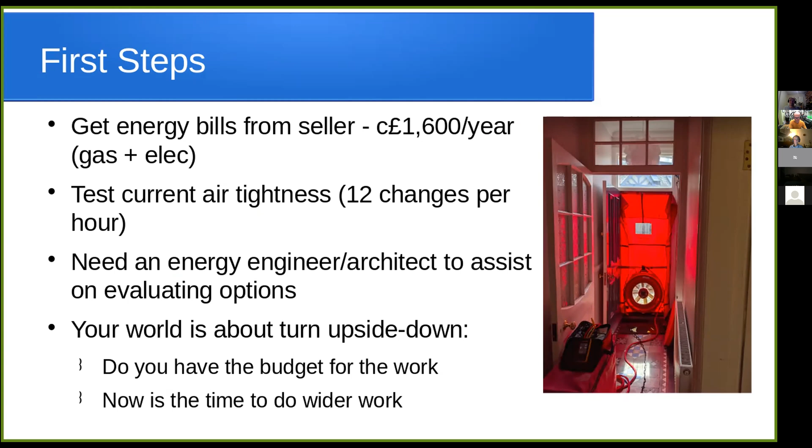So part of what I would do differently is I would think again about whether I could get someone to project manage on my behalf and pay for that. Taking that on board, I hadn't anticipated just how stressful that was. So getting someone as a project manager might be worth paying for.

In terms of that first step, what we did with Phil was we worked through a series of options using Passive House software to make our decisions around internal wall insulation versus external wall. If external, what are the issues with planning? So we made an early planning permission application - I can't remember what you call it, Phil, but there was like an initial request - so we could get that answered quickly.

We made that application, and it was very clear quickly that it was a no-go with external wall. So fine, we're going to do internal wall. Or which walls should we do? All of them? So we looked at what if we just do...

We're an end of terrace property. Maybe we should just do the end wall and forget all the bitty bits around windows. What does that do? Should we do floor insulation between joists? Should we be focusing on air tightness? Should we be focusing on glazing, etc.?

You get the outputs from the Passive House modeling, and it gave us a sense of what we needed to do. Then we could start budgeting and thinking how that marries up to what we want. It also allowed us to think a bit around what heating system we wanted.

The software is really good and very intuitive, and someone like Phil or others, if you're not too comfortable with some of the values it's talking about, it still gives graphical outputs like this and can be quite easily summarized, so you can have a meeting to discuss options.

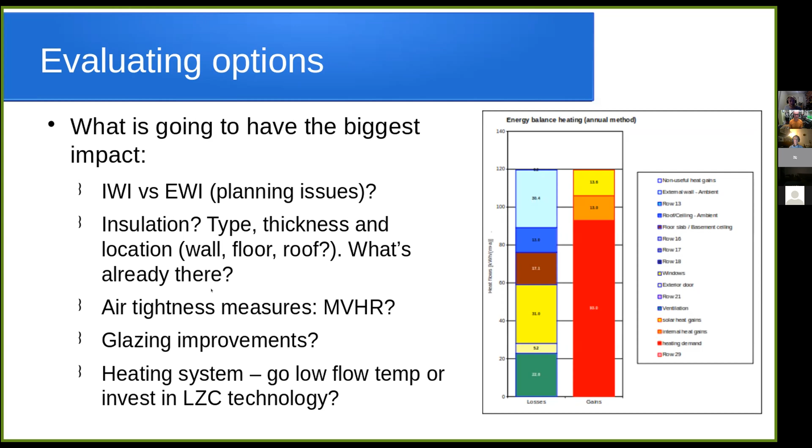I then got my crowbar out and started ripping stuff up, so I took out the floor. I used a Leeds wood recycling company to recycle all the timber. They're really cool - it costs basically the same as a skip, but they recycle all of the timber, and what they can't use goes to biomass incineration or chipboard, I think they said. They're a local community investment company, really lovely people.

So I did about 3 trips with them. We had a lot of timber. I started to excavate, and that's when the problems started to be uncovered.

We discovered - it was quite comical actually - that the underfloor vents that were meant to be under the floor were actually not under the floor at all. There was, surprise, massive water ingress around this point. I don't know if you can see my cursor. As a result, all of the joists were completely rotten. But in a way I thought, well, that's a shame, but at least I've identified it.

I can plan for it now, and started getting quotes from builders to have the joists replaced. But that was an unexpected cost. We also put in a telescopic ventilation system - that sounds fancier than it really is, it's just a piece of plastic that takes the air beneath the floor, as opposed to just simply at floor level.

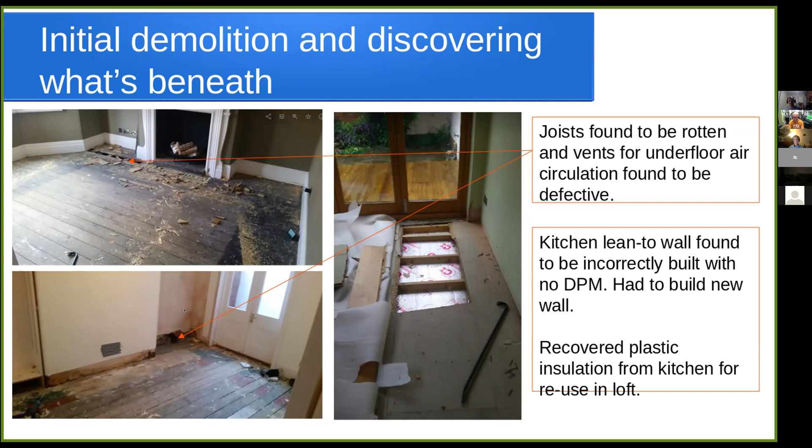Anyway, so initial demolition to start to figure stuff out. We then got the builders in to do the heavy demolition, and there was a big decision: do we or don't we take out the chimney stacks? In the end we decided yes, we should, because we're going to do internal insulation, which means we're going to lose space.

We're going to lose at least 100 mil, because that's the depth of the insulation, plus you're going to have skims of plaster, so you're going to probably be at around maybe 120 mil by the time you're finished. But if we take the chimneys out, suddenly the rooms become squarer.

Allowing us to be a bit freer in the room, and we've freed up all that space, so it doesn't feel like we've lost anything. If anything, we've gained space. So that was quite attractive. Plus, we've now removed one of the key heat losses, which is the chimney itself, just all of your air going out of the chimney. If we'd retained it, we still would have had to have ventilated it, and so you'd be losing air, heat through the chimney. So all in all, it felt like a good decision.

So the steel plus replacement demolition costs about just under £5,000. So it was quite an investment, but I thought well worth it actually, given the space we were saving. So yeah, that was a big decision.

We then got all the walls, all the external walls, taken back to masonry, and this is so that we can then start building up the insulation. And we were going to settle on a wood fiber insulation.

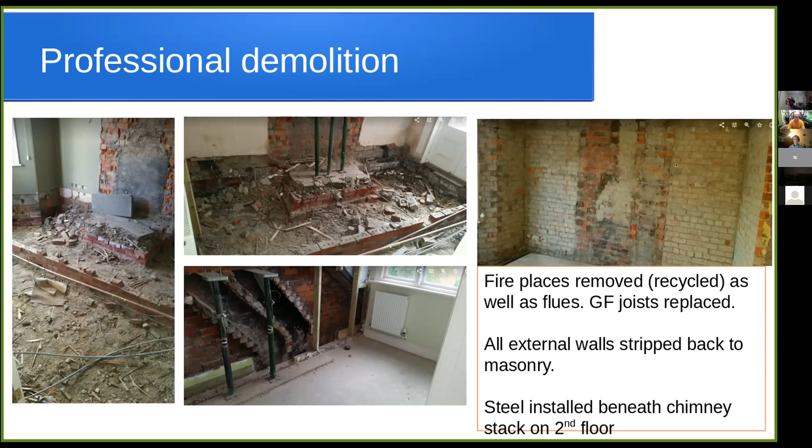So anyway, we did repoint at some points outside, but I couldn't afford the whole house, unfortunately, but maybe one day. So anyway, lots of demolition.

Then got a fantastic local contractor called Craig Young, who does a lot of external wall rendering, but importantly, he's got a rendering machine. And so we talked to the supplier and confirmed that we could use his rendering machine with lime plaster. And that meant that Craig was able to offer a really competitive price for what this is.

So there's a kind of Which report that suggests that if you were to do plastic insulation between kind of stud work, you're looking at about £10,000 to £12,000 on average for a property of this size.

With Craig, we were able to do, essentially, a natural fiber, wood fiber system. So labor plus materials came in at about £25,000. So it's definitely, obviously, more expensive, but it's far more labor intensive.

Craig could have a team of 4 guys rendering. If you think most people want to do dot and dab plastering, this is rendering onto a wall which is uneven, Victorian. Got to get it pretty straight.

You can see him with this. This is when he's just done the first coat before insulation. They've got to get it all pretty straight so that you're not going to get air pockets behind. And then insulate once that's been done, and then do another skim as well.

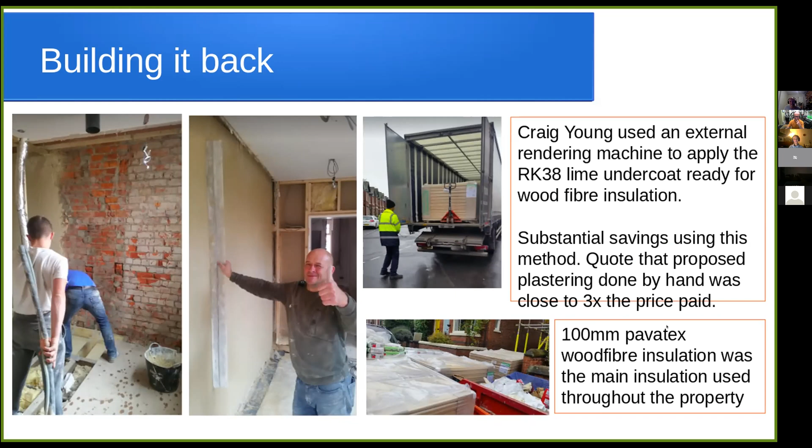At one point I thought perhaps I'd over-ordered, but I hadn't - I was about 4 or 5 panels out, which you're always going to get some excess. I was able to freecycle those, and I think a local guy actually insulated a birdhouse, or a dovecot I think it was. Anyway, good, lucky doves. So that was the beginning of the insulation.

Here we can start to see as it goes on the wall - it's a tongue and groove system, and they use plastic pins effectively to adhere it. There's an adhesive that goes behind the insulation, and then you use plastic pins to hammer it in and hold it in place.

For the kitchen we used cork - this is 100 mil cork. I didn't actually want to do that, but had to, unfortunately, because our supplier insisted on it, as they were concerned about damp moving up into the walls. Cork is much better than wood fibre at dealing with more severe damp, were that to happen.

But having done the cork, this would be a lesson learned for me - it was actually very easy to cut. You could do a mitered cut or a straight cut with a standard circular saw very easily, whereas with wood fibre your blade starts to move. Even with a table saw it's quite difficult to cut a straight line at 100 mil. I reckon at 50 to 80 mil you'd probably be okay with a jigsaw using a special insulation blade, but once you got to 100 mil the blade would slightly move, and it was very difficult - I think it added a lot of time to the work.

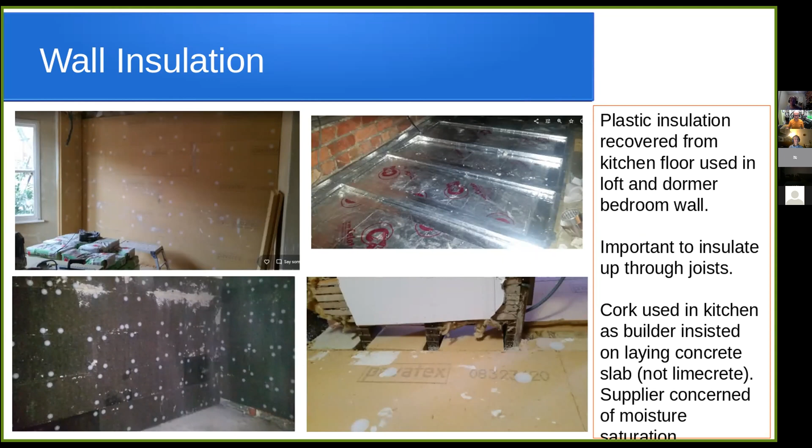But it's definitely important to insulate through - there's quite a good study from Leeds City Council on insulating Victorian homes. I'll try to dig that out - Phil, I don't know, we read it at the very beginning of the project. I don't know if that's something we can dig out and put in the chat, but I found it really useful as a document, like a really handy guidebook.

So once the floor joists were in, I then put a vapor membrane, a vapor barrier underneath. I then put an airtight barrier on top, and put battens in to allow insulation in between.

I had spaced the joists from the recommendation of the guy who came from Sheffield. It was the best call out actually, so even though it was expensive, I paid for it. His advice was make sure the joist spacing fits the insulation, because the wood fiber insulation is really difficult to cut in a straight line. Whereas I had them spaced exactly right and slotted it in, and now I look like a pro. If I'd got it even slightly off, it would have been very difficult to cut it professionally to make it look good and snug without gaps. So that was a good tip I got.

Oddly, the Pavatex floor insulation only comes in 2 widths - I can't remember exactly, something like 375 mil, but look that up. If you're re-spacing, space it to match. And then finally on the right, you can see I got underfloor heating, with aluminium spreader plates and plastic pipe.

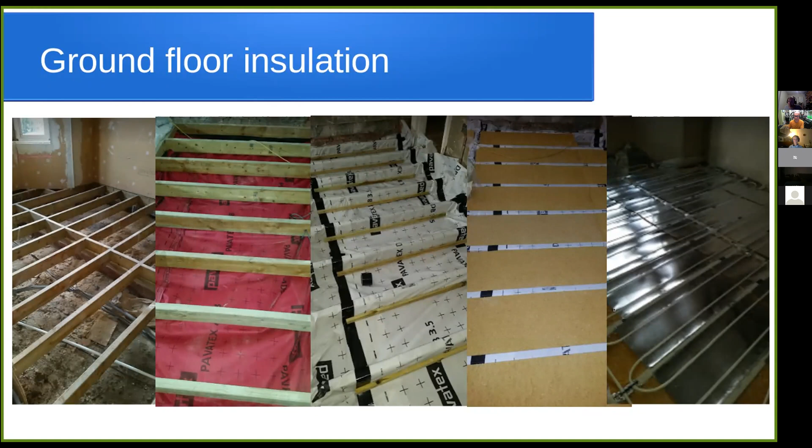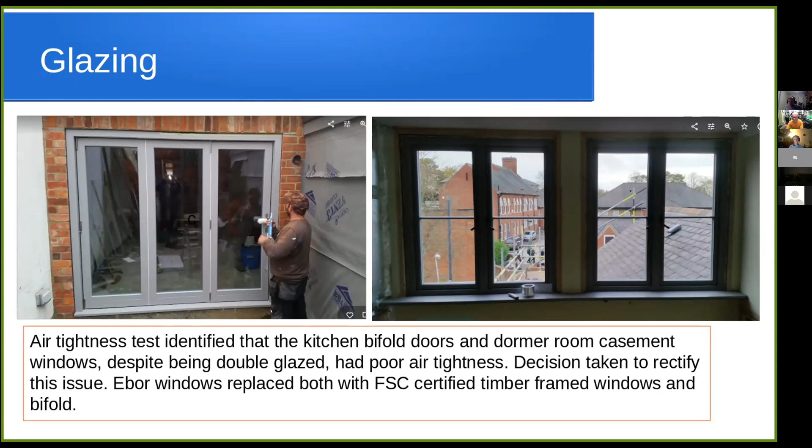With the air tightness tests, we identified that the bifold doors at the back and the casement windows in our dormer bedroom had air just gushing out. That was a difficult but necessary investment decision - it was much more about air tightness than about glazing being double or triple. The bifold was a real investment, FSC certified, triple glazed, argon filled - quite a sting. Casement windows were more affordable.

Ventilation - this was another decision. We decided we're going to go for it and go airtight, as airtight as we can get it. That means we need to think about ventilation, because if we're stopping air getting in, what are we going to do with moisture? We still need to breathe, so we need some mechanism of changing our air.

So we looked into this and really umm'd and ahh'd, but we decided to go for mechanical ventilation with heat recovery. It's a big investment, about the same price as a heat pump - we paid just shy of £10,000, a very substantial investment. But I think it was the right decision - it manages our moisture incredibly well.

We have 2 kids, we're always washing, and in the last place I had black mold everywhere - it was actually getting scary, and we were constantly bleaching. It was just a nightmare. Whereas now, it's just managing our moisture - the moisture content of the air is completely managed by the system.

It's got a condensate pipe that effectively discharges whatever it's not able to reject out of the vents at the top. It's fantastic, really is. From an energy efficiency perspective, it's unreal. It's the operating cost of a fridge - about 25 watts.

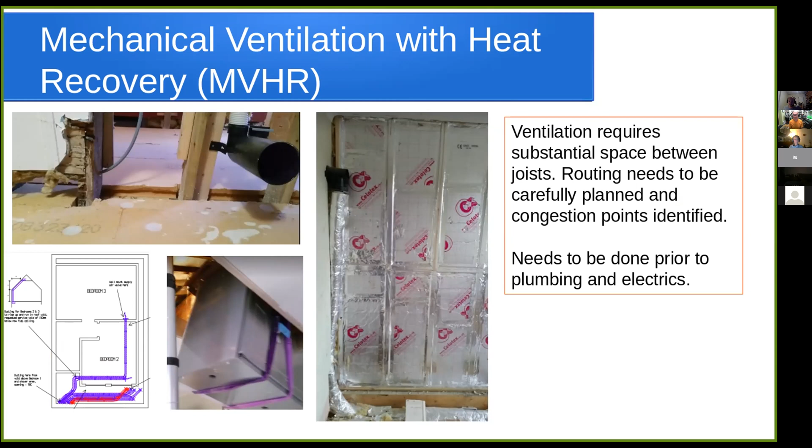So they did their CAD drawings, and then reality on the ground was we did something very different, because they can do their best on CAD, but it's only when you're on site with the guy that you're actually going to figure it out. Air tightness was another area - I did all the air tightness.

Making sure when you're putting - so I was about to build a subfloor here for our washing machine - well, make sure it's all taped up nicely so that when you then put something on top of it, maybe do a mastic type finish around edges, that actually beneath you've made it really airtight as well. So again, on all the stud work, where there are obvious points of possible air infiltration through underfloor, making sure that's done. Using membranes across kind of steel.

That's what's holding the flue up, the chimney stack. Again, really taking the time to put a membrane where needed, and then I've sealed that off afterwards. It's quite simple stuff, but it's quite impactful.

Before I had my second air tightness test, we halved the air infiltration, and that's before I finished boxing out ducts, so I still knew there were quite big gaps, but I already halved it just by doing these measures.

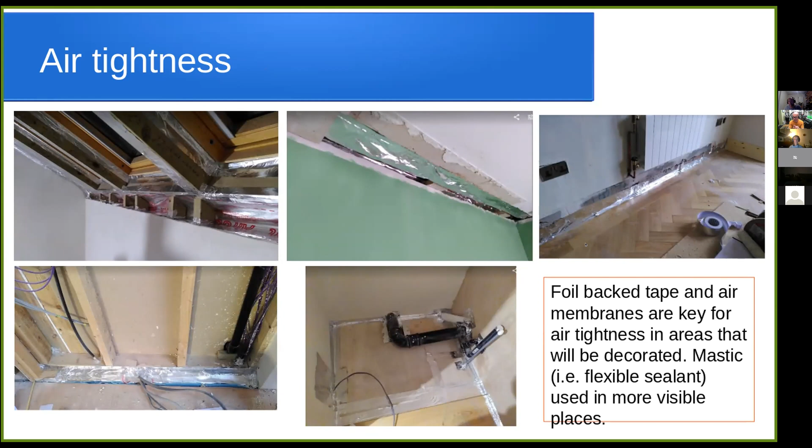So I hope to get down to about 3 air changes per hour at 50 pascals. I did some research, because it's quite hard to get to - obviously the house is never at 50 pascals, it's atmospheric pressure. But the rule of thumb I was googling the other day is you divide by 20 to get your rough atmospheric changes. So that's already going to be pretty good. If I get 3 divided by 20, or even 3 divided by 10, that's still pretty decent in terms of heat loss calculations.

From an energy perspective, you can see in the loft, that's where the MVHR unit is, with the insulated ducts going into a manifold that then leads to the radial ducts that go to all of the vents in the house.

This is our 8 kilowatt heat pump, and I put a kind of slatted finish on it - that was a provision of the planning permission. But personally, I like the look of a heat pump. I want people to know we've got a heat pump and that this is the future. But anyway, planners saw it differently, so that's the kind of finish.

Key there is obviously you don't want to over restrict the airflow into the unit, otherwise you've just undermined the whole purpose of the heat pump. So it's got no top, very little on the back and sides, and it's really just more visual.

We went a bit kind of luxury and did a battery. That's just because I love energy and understanding how it all works. This is, I would say, a nice to have - it's definitely not a must, as with the PV here which we put in. Different people have different views.

For me it's all about the heat pump, and we also put in solar thermal for our hot water. So from about April all the way through to September we get all our showers, hot water, baths, and so on just from this. It's amazing stuff - it just holds the tank at about 55 degrees and it works really well. I've been so impressed actually by the solar thermal.

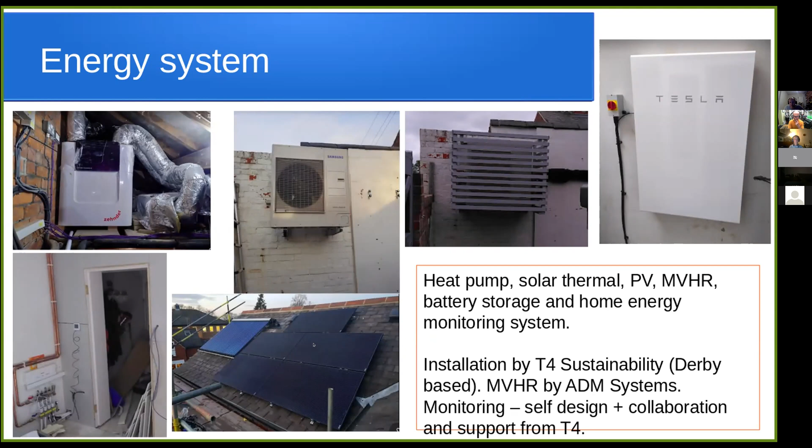I also properly nerded out and developed a home monitoring system - coded it and even designed the circuit board and all the instrumentation to monitor our home energy, simply because you'll get like the heat pump...

Samsung might have its app, Tesla's got its app and it's pretty whizzy, the Tesla app, and Resol will have their solar thermal app. But who wants to just keep flicking across apps? I kind of wanted a one-stop shop, and I also wanted an underlying database that gathered all the data, because that I always had access to and it was mine and it was there, rather than saying download it.

So I developed this in collaboration with our heat installers. They've got their system - T4 Sustainability have an OBEMS energy monitoring system that they do with a Raspberry Pi. I wanted a graphical user interface so I can look at it on my phone rather than just go to a desktop, so I developed in Python the GUI and the instrumentation, and then used their software, which they publish on GitHub, to do effectively the pulse metering server.

So effectively every time there's a watt hour registered in our electricity submeters for the heat pump, for the solar pump, for the PV of course, and the battery, then effectively the server in C++ takes note, and my software then talks to the server and says, 'Hey, how many pulses have you had since I last talked to you?' And then it will update the calcs accordingly.

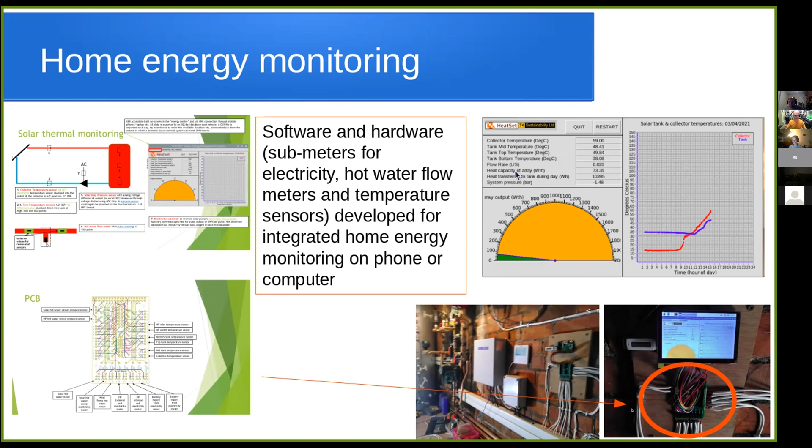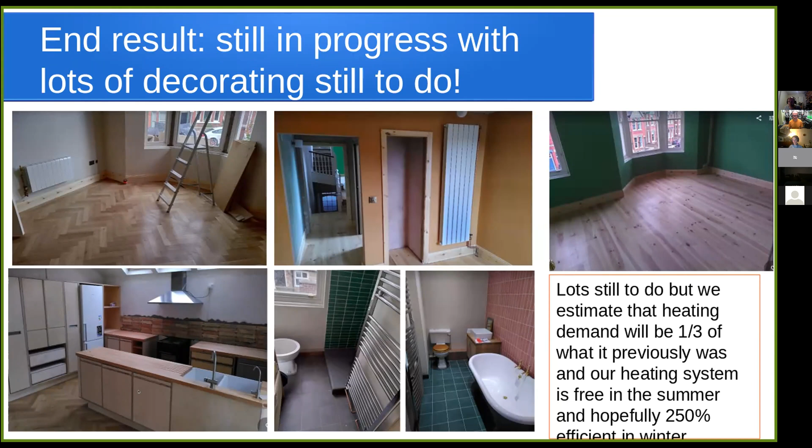And then the finish - so I ended up building my own kitchen, and that actually is what allowed me to pay for the MVHR. So big savings if you can build your own kitchen. I was amazed at how expensive kitchens are, but by building it myself it cost me about £3,000. So that was quite a substantial saving, and it's beautiful - it's FSC certified, birch ply, low volatile organic compounds, just what I want for my kitchen. So I was quite pleased with that.

I've put a few lessons learned, but I've said most of them through, and I'm sure I've talked way too long, so sorry. I think now I will pass on to, is it Phil? Yeah.

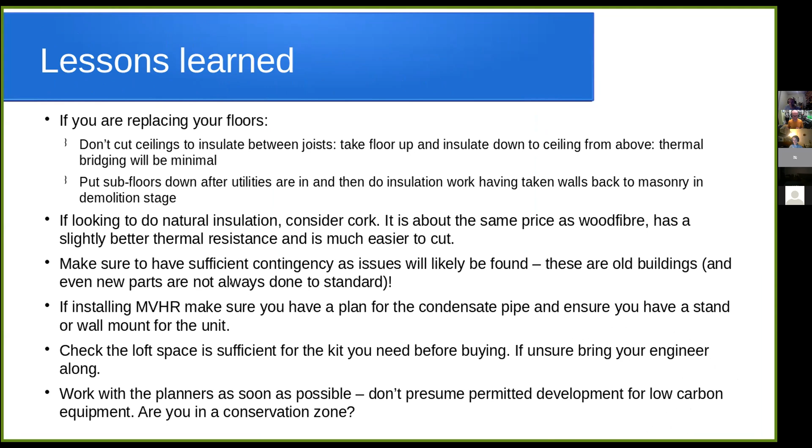Okay doke, I'll romp through mine. I think George has given a really good flavour for what's involved in getting your hands very, very mucky with the whole process. We got ours slightly less mucky, but I'll take you through the highlights of it. So if I just quickly share screen with you.

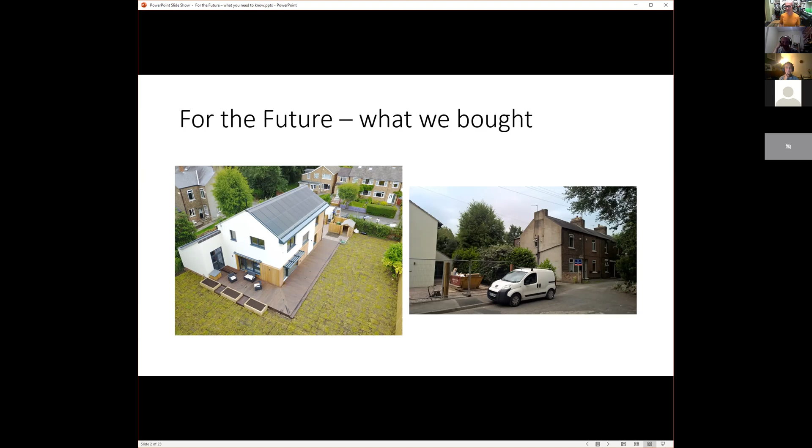An elderly lady had lived there previously, so nothing had been done to it for years. It's in a shameful state, and it's just the kind of place us architects love to find. Running through what it was like at the time, this flags up what's a good building to do stuff to, and it contrasts very much with George's lovely house, where, as he said, when I walked into it and saw what he was planning on doing to it, I nearly had a heart attack, but ours was very much up for it.

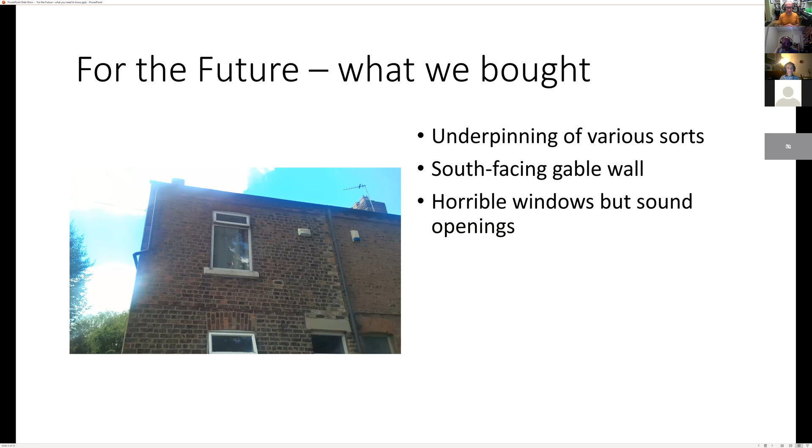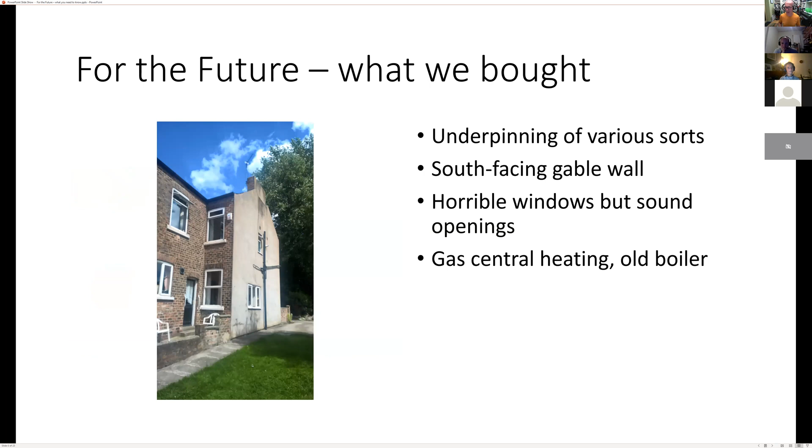The brickwork to the front and back of the house was in fairly reasonable condition, and we quite liked the idea of keeping it that way. The flank wall had already been rendered, so it wasn't something we necessarily wanted to keep exposed, but it did face due south, which we thought might have advantages as we went forward. The windows were horrible, but the openings they'd been stuck into were still in reasonably good condition. The house had gas central heating with an old boiler, and you can just see the flue coming out of the bedroom wall where the boiler lived in a cupboard.

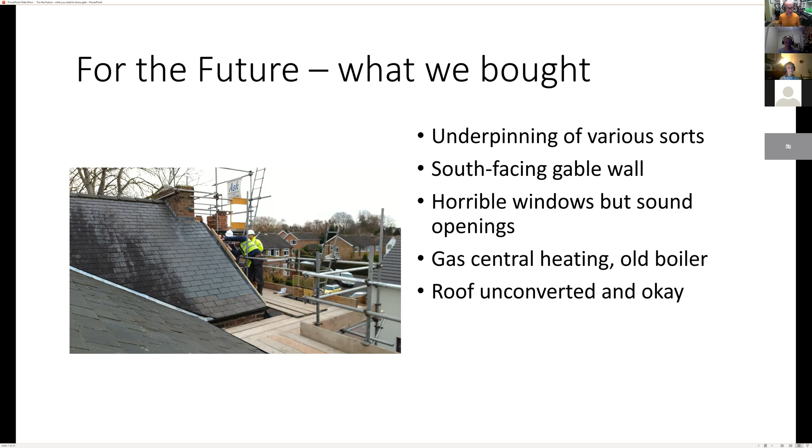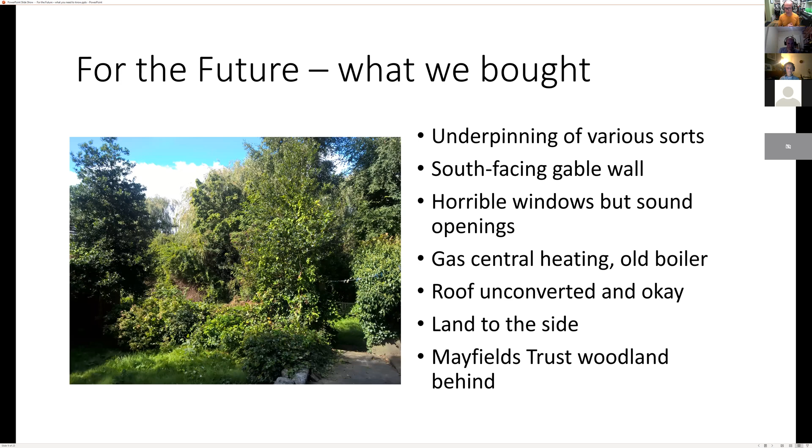The roof had not been converted. It was a standard loft with a loft hatch into it, but the roof was in reasonable condition. The house, importantly, had land to the side of it. The plot was a reasonable size, so there was room to extend the house at ground floor level if we wanted to, which was something we were considering. And it looked out at the back onto woodland managed by a local trust, which was a lovely thing to look out onto.

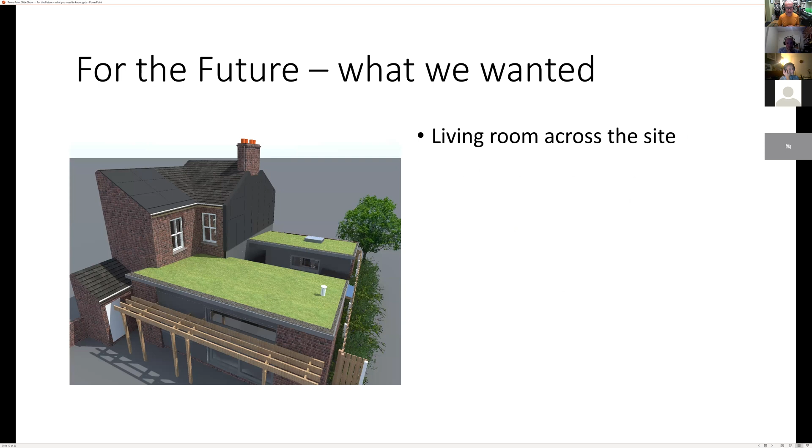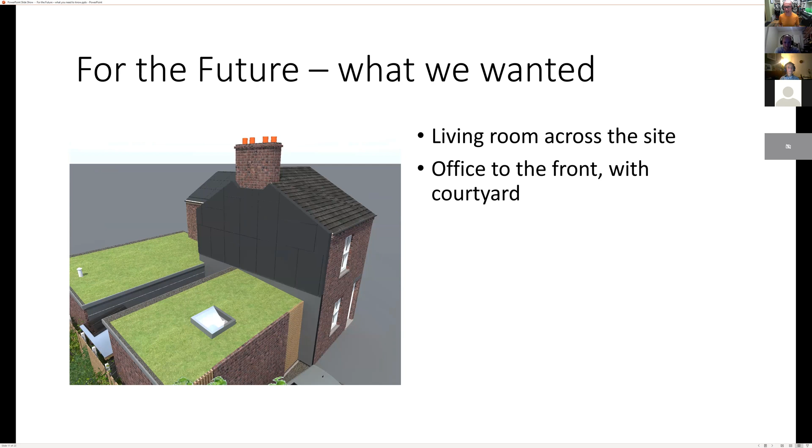The things we wanted to do to it in order to provide what we wanted was to extend across the site with a living space at the back, as you can see in the foreground of this image, and an office for myself to the front of the site. A courtyard in between the two where I would have a short walk to work, about 6 feet, and our bikes would have somewhere to live. I designed it so we could put green roofs onto the two extensions, just to try and return to the people who lived over the road some of the green we were taking away by building on the land to the side of the house.

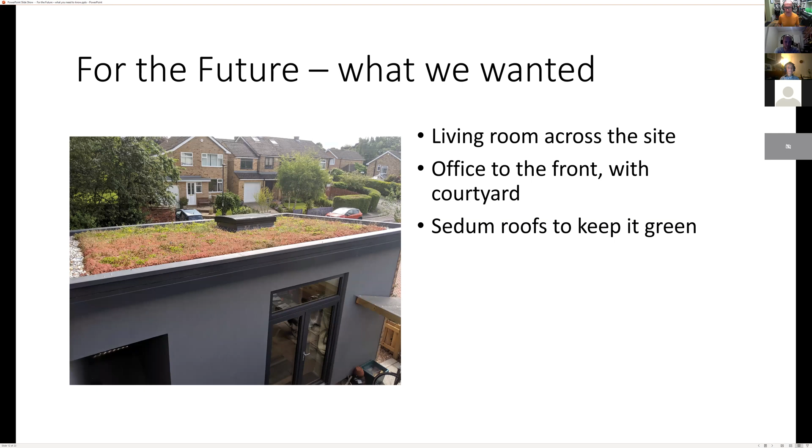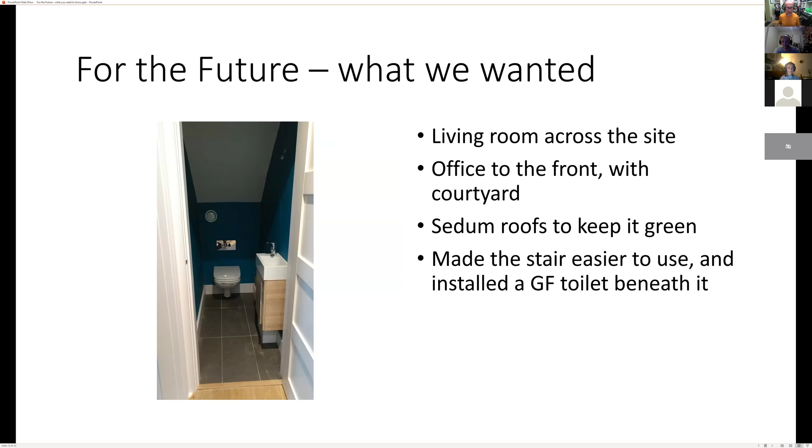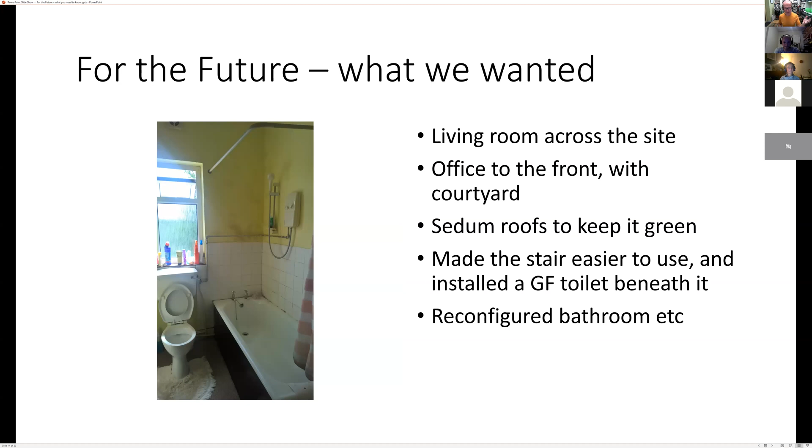We ripped out the staircase, which you virtually needed climbing gear to get up, and put in a shallower staircase, altering the planning of the ground floor to allow that, and we installed a ground floor toilet underneath it. We reconfigured the very nasty bathroom upstairs, shown in this image, and a very small bedroom, to turn into a couple of rooms for utility cum laundry cum toilet, and a bathroom and shower room.

And the steps along the way that were key: first thing, as George has mentioned, we set up an energy model using PHPP, the Passive House Planning Package software, and used this as a way of seeing what kind of things we could do to the building and what kind of impact they would have.

So what we ended up with was, in trying to get the heating demand of the house down by improving the energy efficiency of the fabric, we used a mix of external wall insulation on the gable wall, which was already in a mess and where we were going to do things on the outside, and internal wall insulation to the front and back of the house to keep the brickwork on the outside. We increased the loft insulation because that's an easy thing to do, and we left the ground floor of the existing part of the building well alone because the whole house was standing on that.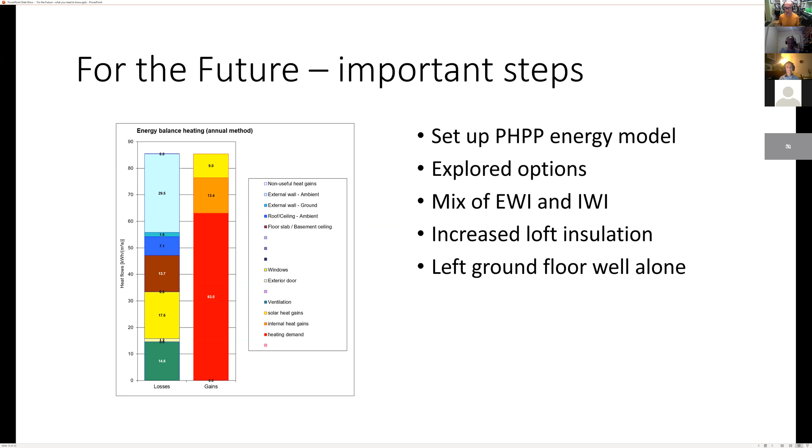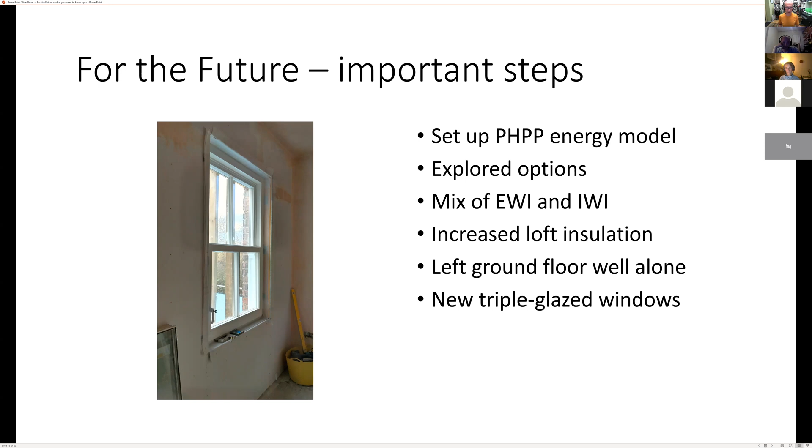We ripped out the nasty aluminium windows and replaced them with triple glazed sash lookalike windows - actually a tilt and turn bottom pane with a fixed upper pane, which looked very convincing and took the house back to looking more like a Victorian house, but gave us really good performance. And we got a new insulated front door from the same company, which matched the neighbour's door almost perfectly.

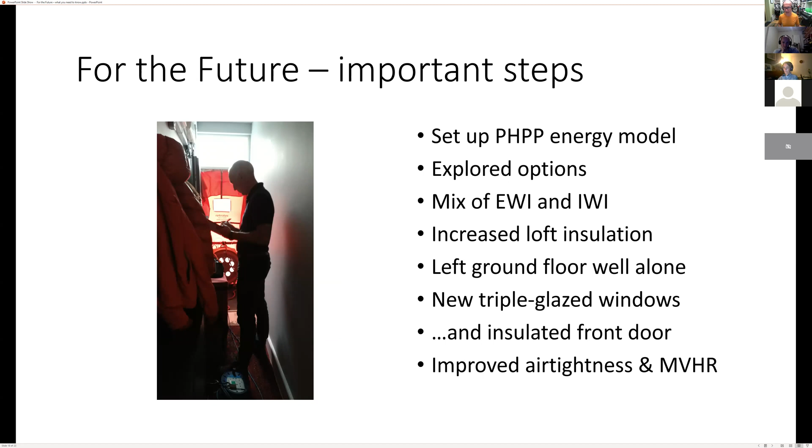We used the whole process of doing the improvements to the fabric to improve the air tightness of the house. So when we were insulating, replacing windows, and doing things to doors, at the same time we were sealing up leakage and improving air tightness to get the house to the point where mechanical ventilation with heat recovery is worth putting in, so you're shifting around a known amount of air rather than half of it disappearing through leaks in the house. George has already said a bit about the benefits of mechanical ventilation with heat recovery in terms of energy savings.

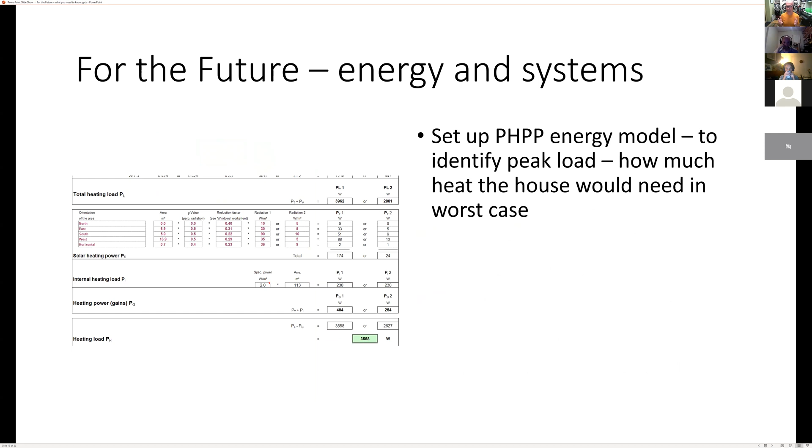So what I did as part of setting up the energy model was try to find out what the peak load was - what's the worst case? How much heat does a house need in the middle of winter when it's 0 degrees or less outside, when you want to keep it at 20 odd inside? And we set up the energy systems of the house to provide for that.

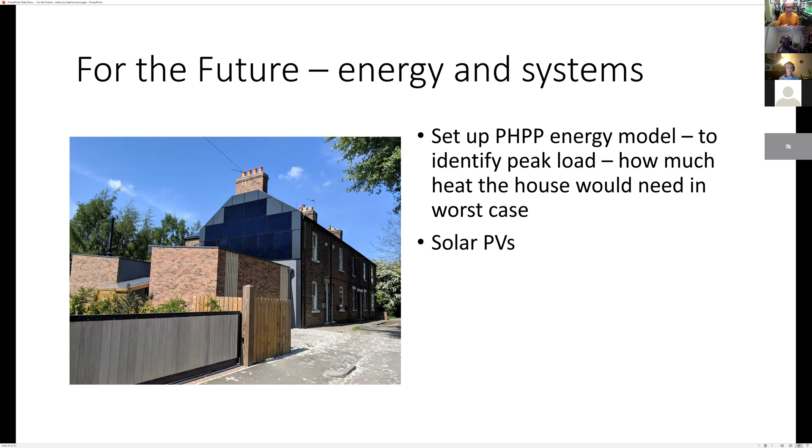So what we ended up doing was putting solar photovoltaics onto the gable wall of the house and onto the roof of the back addition. So we had a mixture of vertical and sloping panels, all of them facing absolutely dead south.

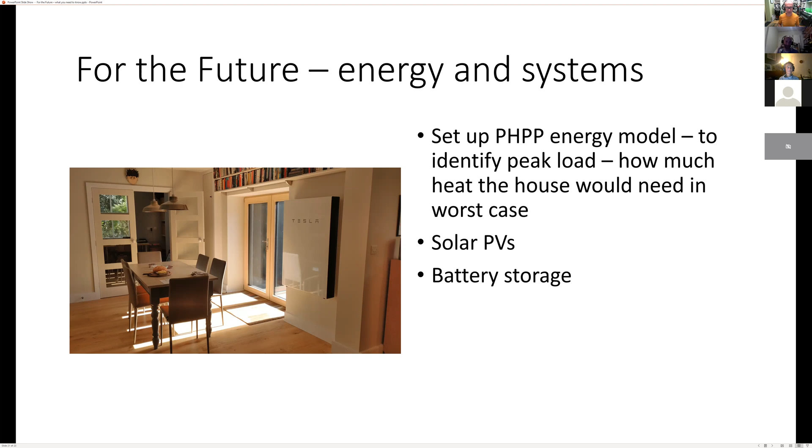We installed, like George - we are the Tesla Installation Appreciation Society - a battery, in order to do two things. One was to make use of that solar photovoltaic capacity, so rather than exporting when we weren't using it, we were able to dump it into the battery and make use of it later. And also the ability to buy cheap electricity and then use it during the day.

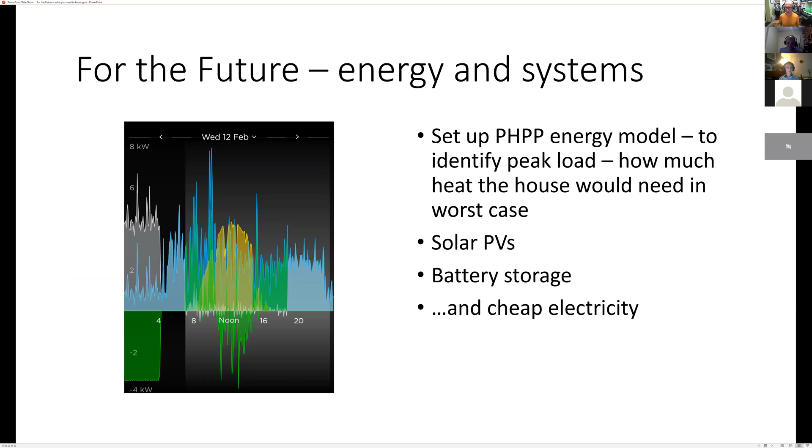The graph you see here on the left-hand side shows 4 hours of nighttime charging, where the grey above the line is grid electricity coming into the house and going straight into the battery, which is the green block underneath the line, meaning we're buying it at very cheap rates and are able to use it during the course of the day to get us through the expensive electric period.

So just some reflections on that process: first is that moving house provided opportunity. As George said, even with a house that's got nice finishes inside, it feels much less painful trashing stuff when you're not living in the house and haven't got used to it being yours, than it does when you've done it yourself and it's a kind of ripping off stuff you've done to the house previously.

So it was a really good opportunity to buy somewhere that drastically needed work, and use that as an opportunity to create something which worked in the future. We bought the property with the extension and alterations very much in mind. The house as it was would not have worked for us - there wasn't enough space downstairs for us to live in, but plenty of space upstairs to sleep in. So we bought with a view to the future, which means going around houses with a mental image not of what is there, but of what you want to be there. I appreciate as an architect I've got a bit of a head start in this, but it's something to really bear in mind when looking around.

The next point was the freedom to focus on what was important to us. We wanted nice living space that related well to the outdoors and to the landscape. I wanted this short walk to work, and we didn't want too many spare bedrooms, because the last thing we wanted was members of our extended family deciding to come and stay with us for ages. So simply having 2 bedrooms was absolutely brilliant.

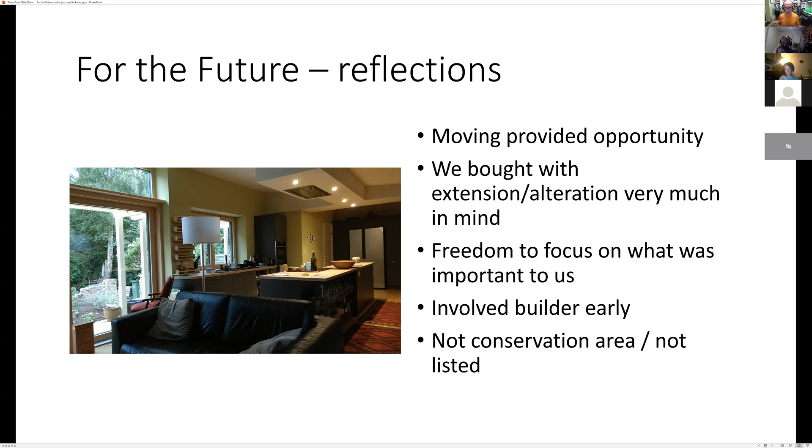The last point is we'd moved from a listed building on Holgate Road, which was lovely in many ways but an utter pain - there was absolutely nothing we could do to it without applying for listed building consent, which is not good. The chances of getting the kind of things we wanted, for example, at one point I contacted the planners about putting solar panels on the front face of the roof. The planner basically laughed. What he eventually suggested was putting solar panels on the north face of the roof, which would be fabulous in terms of appearance, but wasn't going to do much in the way of generating electricity. So the idea of being in a conservation area or listed building is lovely from the point of view of heritage, but from the point of view of creating a house for a sustainable future can be extremely problematic. That was a consideration, and that's my last slide.

So I will stop screen sharing.

So yes, let's move on to Ivana, because I think one of the things that's come through this process from both of us is that it's kind of handy having someone around who can point you at the right people to do the right things. So I think this is probably where you come in.

You'll need to unmute yourself there. Yeah, I did click on it, but sometimes it just doesn't work. Yeah, so are we doing questions afterwards then? I guess I will try and be brief, so maybe, yeah, okay.

I've just posted a link to an article I came across a while ago, about how to choose a house - maybe if you're starting with the 'I want to retrofit' mindset rather than what sort of house you want, then some tips on how to choose one that will be a bit easier to retrofit than others, which I thought was quite helpful. So that's the thing to think about. I'll burble on a bit while I'm looking for my slides.

So just to put a bit of context, I'm a sustainability officer at St. Nick's, and in my spare time I'm one of the directors of York Community Energy, so two local charities, each doing slightly different things.

St. Nick's is mostly about green spaces, but also encouraging people to adopt a more sustainable lifestyle through a curbside recycling scheme, a low carbon recycling scheme, and lots of other projects. We also do ecotherapy, whilst York Community Energy is very much focused on climate issues in relation to energy, trying to set up a solar co-op, to get solar on schools, but also looking at homes, because around a third of York's carbon emissions comes from the way we heat and power homes.

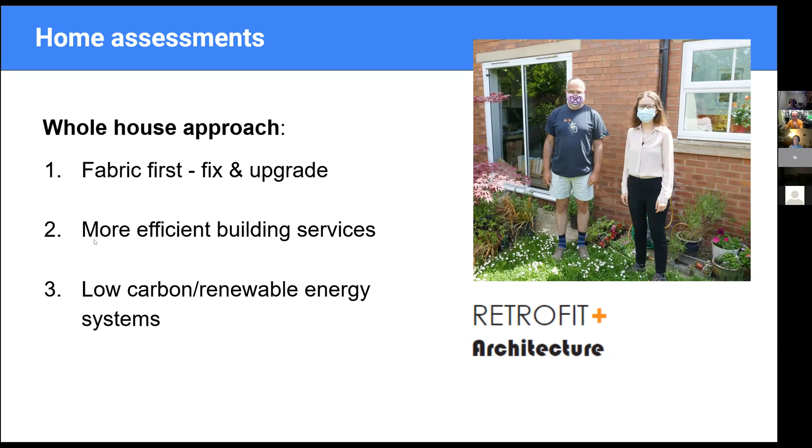She specializes in retrofit, so it's very much her expertise. We can now offer, in conjunction with Maria, a full whole house assessment. That means it's a fairly in-depth survey. We go in, we measure the house, and look at any existing issues.

Then Maria models the house. She tends to use the PHPP software, which Phil and George have both mentioned, because you get the best results and you get fancy graphs. If graphs are your thing, then this is definitely one for you.

We ask for drawings, and we do look at the EPCs as well, even though they're not necessarily that good at giving you a good picture of what the house is like. We try to collate as much information as we can about the house, and talk to the homeowners to find out what their ambitions are, what their priorities are, what it is they want to change about the house. Is it that they mostly want to cut carbon and make the house as energy efficient as possible, or is comfort actually the most important aspect? And what is the budget?

So we have quite a detailed chat, and then Maria puts it all together and comes up with 3 scenarios, going from stage 1, which is basically fixing up issues - some small, shallow retrofit measures - then a middle stage, all the way to a radical retrofit, and what that would entail.

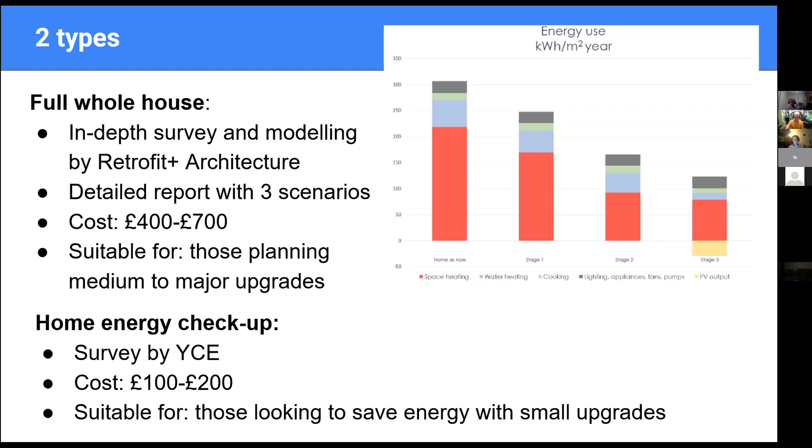The ambition we have is to become a one-stop shop for energy-related advice one day. For now, we're focusing on two somewhat different clientele, if you like, but eventually we want to become a one-stop shop for anyone, regardless of how much money they have or what sort of tenure they have, so that anyone can come to us and ask for advice.

What we would love to develop, and are hoping to, certainly with people like Phil and George who have been through the process, is to find local companies that can actually do this work. Because one thing is producing a fancy report that tells you what to do, but then people ask, okay, so who do I go to actually get the work done? It's proving really difficult to recommend local contractors, so it's fantastic to know who George can recommend - or who not to recommend, maybe. We're hoping to build a database of local contractors that we can pass people on to.

We very much want to be feeding into and being part of the city's retrofit strategy, which is now being drafted, and we hope the council will get more people involved to make sure the vast majority of houses in York get insulated, so everyone can benefit from all those amazing things that Phil and George have, and comfortable houses. That's what everyone wants, and I think everyone has a right to live in a healthy, comfy home.

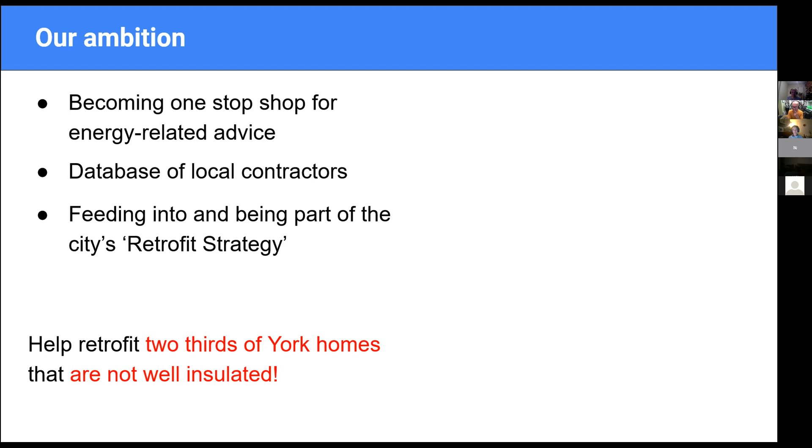So that's the ambition, and in terms of what the future brings, I'd recommend you go see - if you haven't booked your tour on the Open Eco Homes, happening this Saturday, which is an opportunity to go see Phil's and George's house, plus Lyle and Mike, who have done slightly different things in different places. If you haven't booked your ticket, I'd recommend you do book a tour. It's free, and Saturday is supposed to be an okay day as well. So go in and explore and get inspired. Thank you.

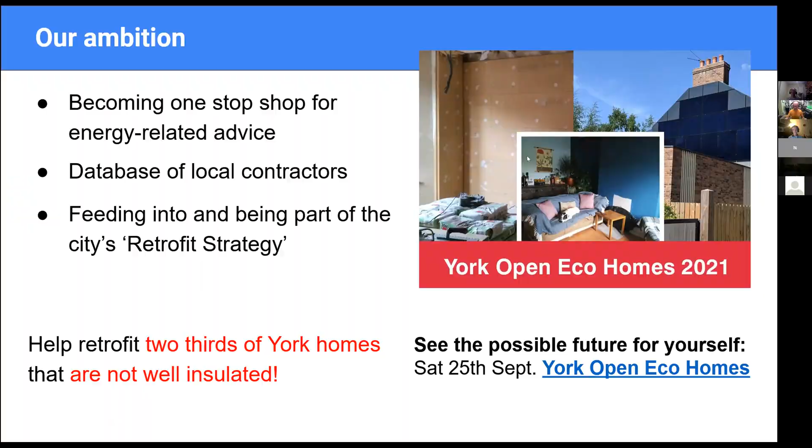Brilliant, thank you Ivana, that was great. So some contrasting stuff on the two projects we talked through, some useful stuff on what help can be given.